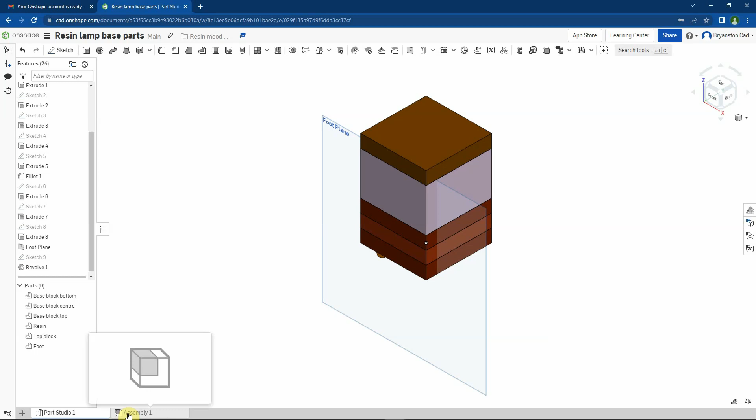You can see I've still got the foot plane showing from previously, but this time we're going to move over into the assembly tab. So we're in the part studio 1 tab. We're going to be using the assembly tab. So I'm going to left click to take us into the assembly tab, and you can see that the assembly tab is completely empty because we've not inserted anything in there yet.

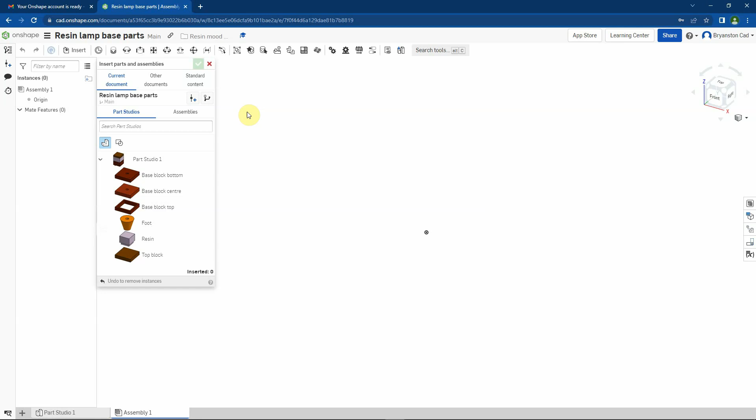So let's use the insert tool. And this brings up our current document. We can also refer to other documents. We could look at standard content. We could look for files that have been shared over the internet or shared specifically with us. I'm going to start off by perhaps cheating a little bit and using the complete part studio.

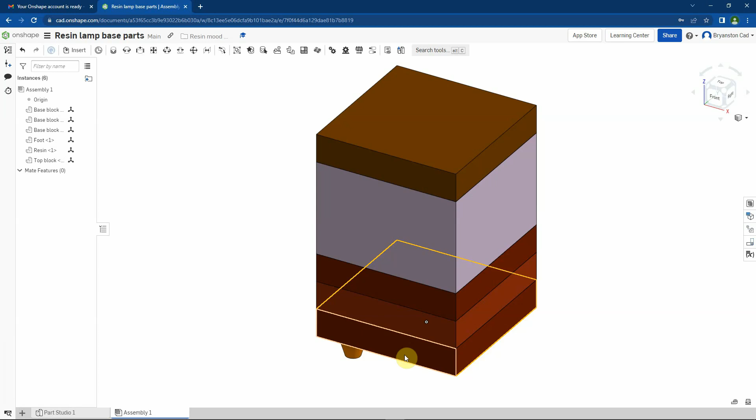So I'm going to left click on the part studio and you'll see it appears over here. Now if I click, it will place somewhere. I'm not going to click. I'm simply just going to tick the green box there, and this means that this has lined up with the origin where it is in our part studio. So the origin is in the sort of center of that first part that we drew.

Two things I'm going to do. I'm just going to drag over to select everything, and then I'm going to group that together. So I'm going to use the group tool, and once I've grouped those together, I'm just going to left click to say that I've grouped them, and then I'm just going to right click, and I'm going to then left click on the menu that comes up onto fix. So this is going to fix all of those components together, so they're effectively mated already.

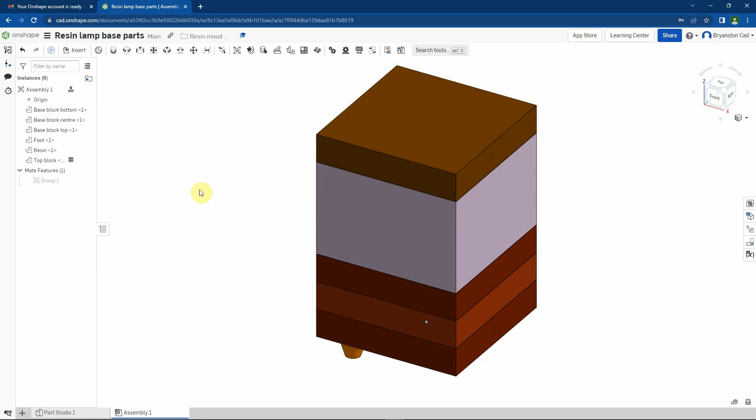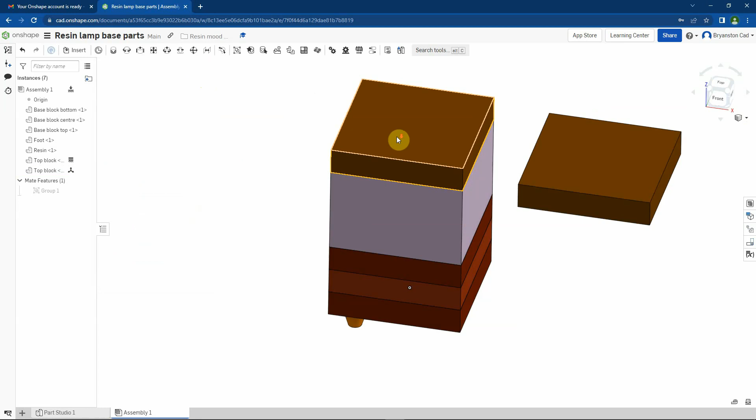However, you'll see that I only have the 1 foot. I need to add some additional feet, and there should be another block on here. So let's insert those. Let's insert the top block first of all. So the top block in my part studio, I can expand and contract that with the little arrow. I want another top block to come in, so let's just click and place it there, and I'm just going to close that down so that we can focus on the assembly. So I'm going to zoom out slightly and just move the block up. Now, because this is a square, it should be nice and easy to attach.

There are several different ways in which I can attach things in Onshape. In fact, it's quite a powerful tool and allows us to have animated assemblies that show how things would actually work. All we're going to do for the purposes of this tutorial is use a fixed mate. So we've got different mating tools, and the fixed mate on here is called a fasten mate. We could have revolving or revolute mates, and we can have sliding mates, and we can have all sorts of other different types of mates, but we're just going to go for the fasten mate. So I'm going to click on the fasten mate tool.

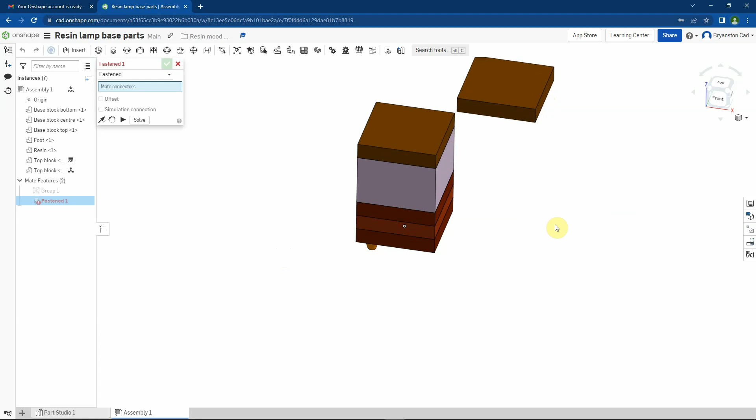Now, if you've used some other CAD software, you may find that you're used to having to pick up several different alignments to get something to be in one place. So you might align this face and this face, and then align that face and that face. So you might have to use several mate connectors or several ways of mating something to get something just to stay still. In Onshape, they use a clever system whereby with a fastened mate, you just need one mate connector.

And to make things nice and easy, we're going to just pick up this corner. So if I zoom into this corner by using the scroll wheel on the mouse, you can see that I've got a red, a green and a blue arrow, and I'm just hovering the mouse so that the blue line is vertically pointing upwards. And I'm going to left click to place that.

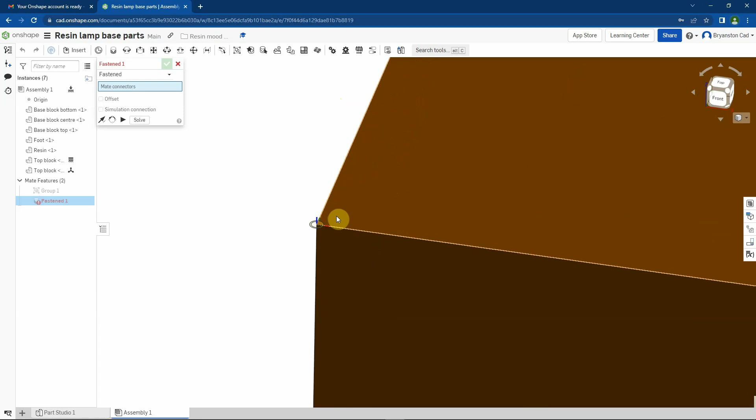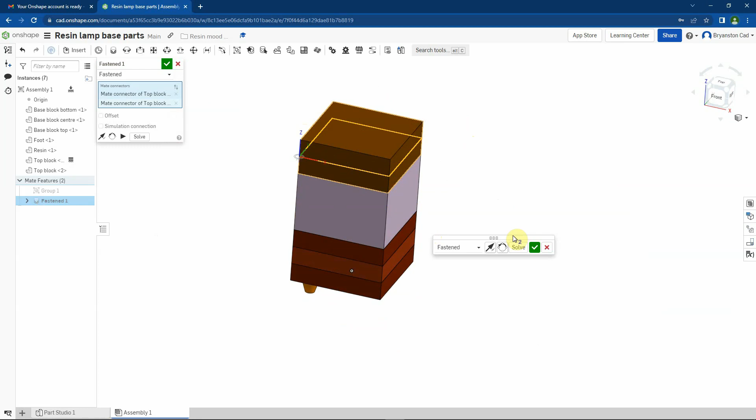You can see it's ghosted, and I'm just going to spin this around and then pick the same corner on here, and if it jumps around I can hold the shift key down to keep them selected, but left click there and you'll see that jumps over, and you can maybe just about see on your screen that the red is highlighted as X, the green as Y, and the blue line is Z. We've got the Z's lined up, we've got the surfaces lined up. We can simply tick that and we're happy we've got those in place.

I'm now going to close that and just spin this around slightly so we can see underside, and we're going to add some more feet in. So let's go insert. Our part studio is already open and we've got feet. So left click on the foot, place the foot, left click on the foot, place the foot, left click on the foot, place the foot. So we've got 3 more feet, so we can close that down.

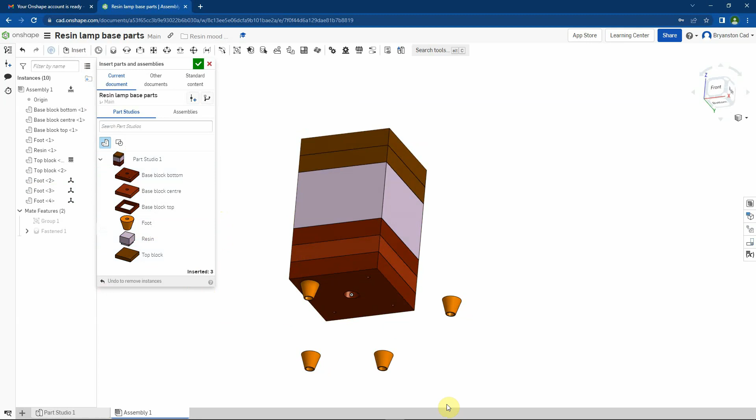Again, just simply going to use the mate tool, fastened. This time I'm going to zoom over to the hole. Once I've got the center of the hole lined up, the blue line pointing downwards, left click on that, and then on this one on the top surface, blue line pointing upwards, left click. That's gone to the right place. I'm going to tick it to solve.

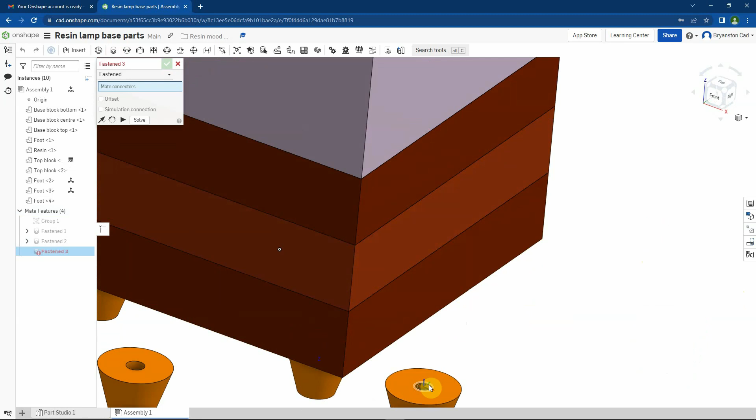I can see this one, so I'm going to left click on that one and just zoom around. Doesn't matter which one I place it on, as long as the blue lines are lining up and I'm lining up with the center on that surface of both parts. So let's do the final one.

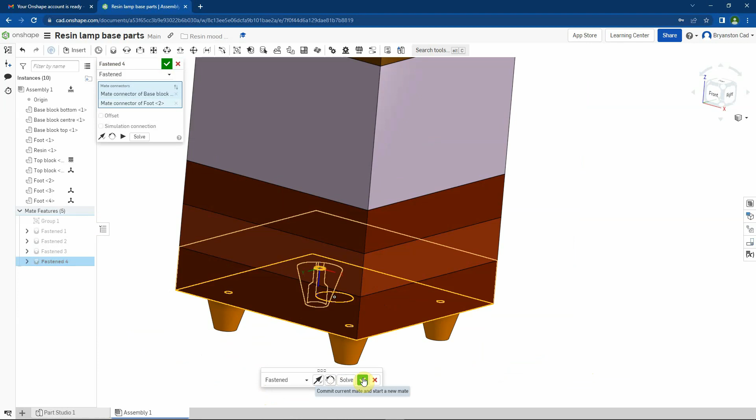Hover over that hole, it picks up the center on that surface, left click, zoom out, spin it around using the right mouse button to zoom in and out, pick up that surface, left click, I can see it's in the right place, left click to confirm, and then close it because I don't want any more mates. Now I'm going to right click in space and then left click on isometric.

And that's basically the light assembled from the parts that the students manufactured when they came and did the project. In the next video, I'll show you how to create an exploded assembly drawing of these parts.